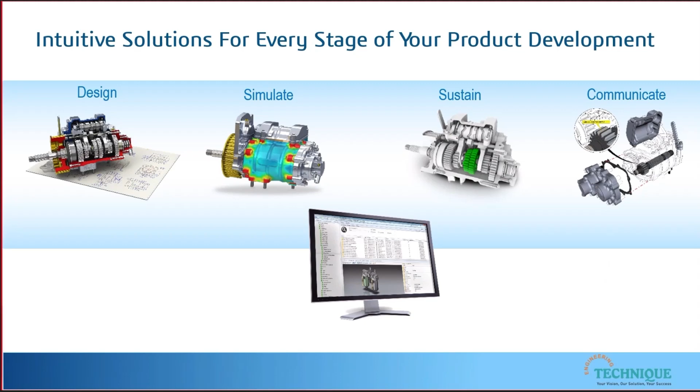Being a reseller, we are not only selling the tools, which is a common misconception people have. We provide intuitive solutions for every stage of product development, whether you want to design your product and create a CAD model, simulate your product to validate it, sustain that data, or communicate with internal and external stakeholders. We provide intuitive solutions for every department that exists in a product lifecycle.

After the pandemic, the majority of us have had to adapt to the new normal of working from home, and many businesses have adapted this into their routine. Without the right tools, this environment presents real challenges when continuing to design and develop products in SolidWorks, resulting in a loss of efficiency. If you want to share and collaborate data with your colleagues or with external stakeholders, it becomes very tough.

So we are going to present a solution for all of these issues, and we call it 3D experience SolidWorks.

As an example, to demonstrate our solution, we are going to develop a filling and labeling machine. Throughout this process, we will see what the 3D experience platform is, get an overview of it, see what a lean team meeting is and how we can arrange one through our lean tools, and then see how we can execute project planning with the help of 3D experience tools, how easily and interactively we can do it.

Then we'll witness what In-Context Modeling is in our SolidWorks CAD tool, followed by issue management—whenever you are creating a model or developing a product, there will be some issues, so we'll see how to manage them. Then we'll see what a structural system is and how we can validate our design within a few clicks, and at the end, we'll witness what SolidWorks Motion is.

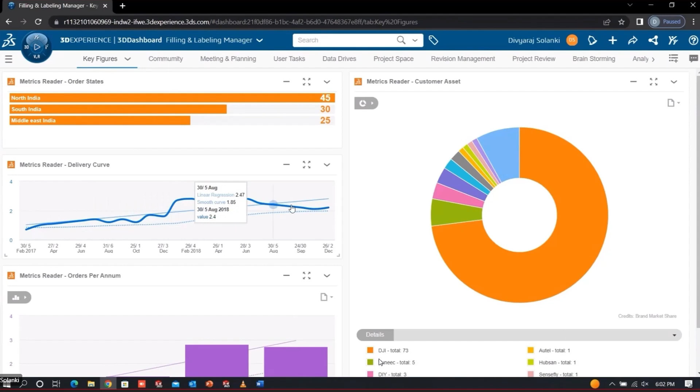Then tabs—tabs are used to manage our tools and data. We have a key figures tab where I'm attaching Excel data files like order state, delivery curves, and order per annum. I can also change the types of bars. All this boring data gets converted into infographics, and I can change the bars to vertical bar, horizontal bar, or pie chart.

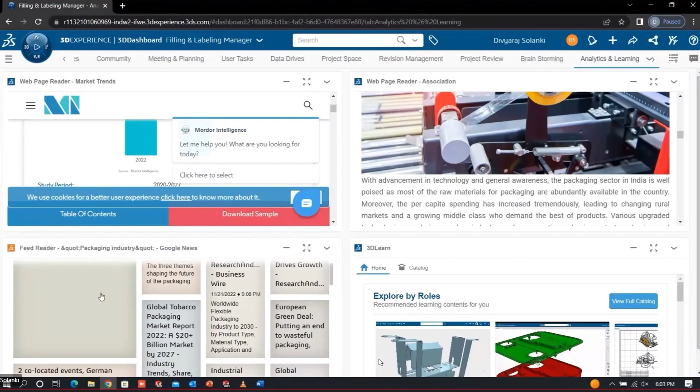In the analytics and learning tab, I have frequently visited websites loaded in a web page reader, so if I want to stay updated with market trends and associations, I can do it. I also set up a news feed to stay updated on the market in a feed reader. And lastly, I have 3D Learn, where I can learn about new tools and apps regarding the 3D experience.

Okay, so tabs contain meaningful apps and widgets. So I'll switch to the data drive, and in the data drive, they can store the data in folder structure, same as a local drive folders, but on secured cloud storage facility.

So I'm loading my 3D files to preview in 3D Play. We'll see what 3D Play is. Let me first load some of the files from my local drive to 3D drive. Just within a few drag and drops, my file has been uploaded there. I can see the preview easily.

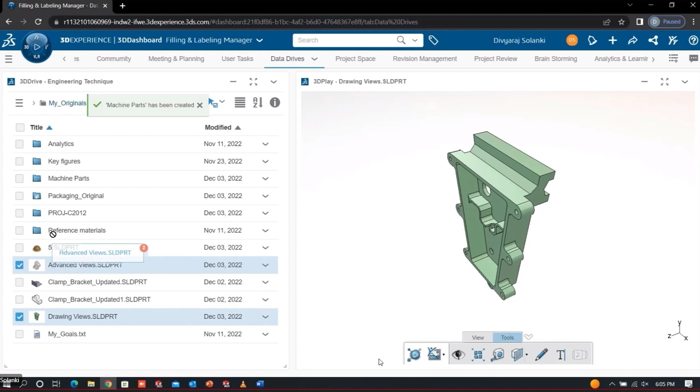We can also create folders easily. So I'm creating a new folder named machine parts. I'm creating a random folder, and I'm just dragging and dropping my old parts into that folder to manage it. You can see how easily you can do it. It is just like the file explorer we are using every day.

Okay, so let us talk more about 3D Play. So I'm loading an assembly. There is a lot more capabilities in 3D Play than just to preview the files. How? So let us see.

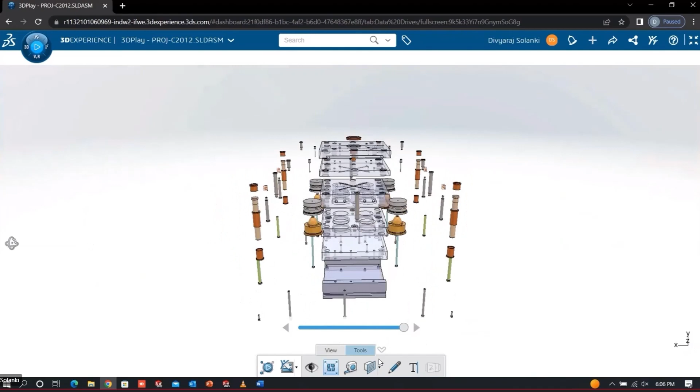In the tools tab, you can see that we have the option to change the display style of the 3D models. We have many options, like shaded, edged, wireframe - lots of options. You can also auto explode your assembly to get better details of the internal parts. It will explode each and every subcomponent of your assembly.

Then we have the option of creating a section. We also have preview - if you want to create a preview of a section model, you can easily do it. You can change the cutting plane, the position, and the angle of your cutting plane. So handling is way better.

And we also have a measure tool. If you want to measure the distance between two faces of the part, you just select the starting and ending face, or starting and ending point, and you will get the distance between them. So we can say it is similar to eDrawings, but it is a web-based app.

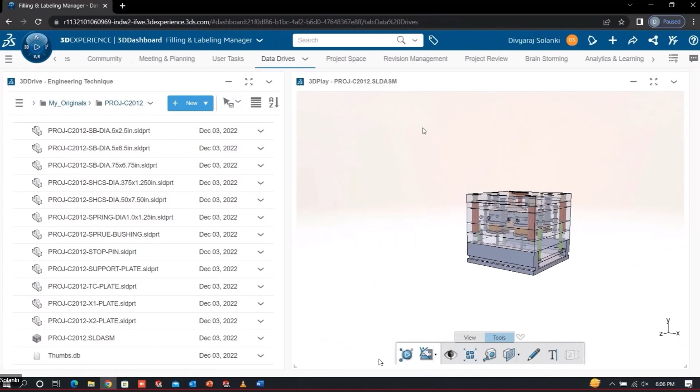Now we'll switch to the project spaces. In the collaborative space, we can create a space for our project and also configure the members involved in it. Only involved members will have different levels of access. So I have created my gearbox and machine mold.

Let me introduce you to the lifecycle tool. With the help of the lifecycle tool, we can manage the different approval processes of the product. So I have loaded a file. What I can do here is change the maturity state of the design from in work to frozen, or directly release.

So what I'll do is change that state from in work to frozen, and then release that product. So the whole lifecycle is managed throughout these tools, and we also have tools like new branch and new revisions. We can easily do it.

And let us switch to the community. So community is like a social media for the corporate world or the enterprise. It stores the history of conversations and helps you collaborate better on the project.

So we have initiated a filling and labeling machine project, and my engineer has updated me through the community. Kiran Khatri is my engineer. He updated me saying, yes, I uploaded the assembly with all the reference files on the 3D drive.

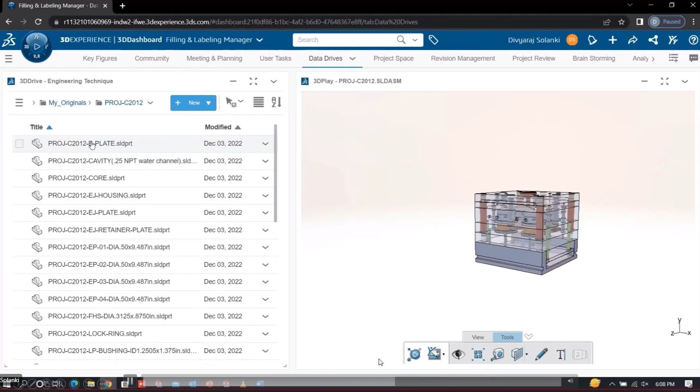Okay, so let me go to my 3D drive where my engineer has uploaded that file, and let me review that assembly using 3D Play. You can see how quickly my file has been loaded into 3D Play - it's a way bigger assembly, right? So my assembly has been loaded into 3D Play.

And I have some suggested changes that I want my team to know. So in 3D Play, with the markup tools, I can highlight the changes. I'm currently highlighting the particular areas of my assembly where I want to add notes or give annotations. I'll attach a text note to these particular arrows.

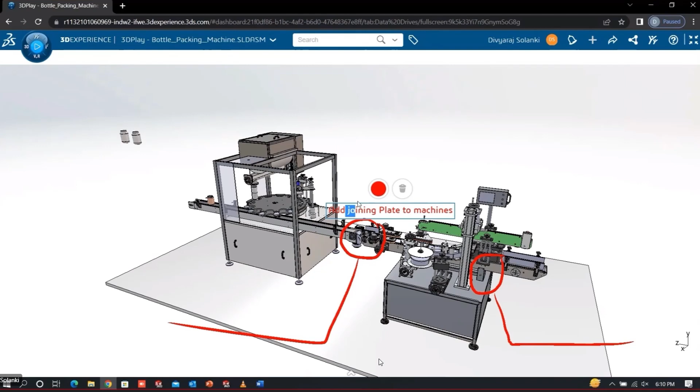So my first one is to add a joining plate to the machine, since I want to join these two machines. So I want my team to add a joining plate. The second is to add the bracket - there is no bracket into my filling machine here, so I want my guys to add the bracket here.

So I made the suggested changes, and I'll click on publish to 3DSwym so I can directly publish this screenshot to the community. First, I have to select the community, which is filling and labeling machine, my current community. I'll add the title according to my convenience.

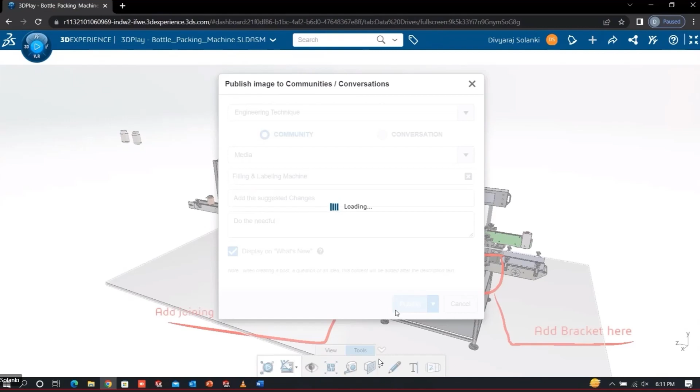I'll add the suggested changes, and I'll also add the comment, do the needful and all. And I have published it. Content has been fully published. We can check into the community that it got posted. Yes, it got posted. So post has been made into the community.

So what I'll do now is create a collaborative space regarding the project, because I want to initiate my project way further. I'll create a collaborative space to handle the whole life cycle of my project. I'll add the title filling and labeling machine and just create it.

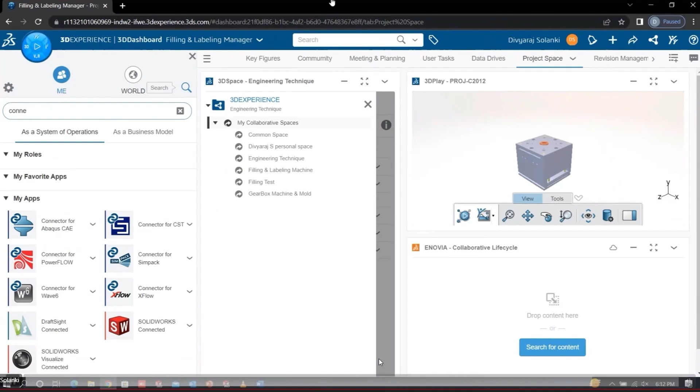So what I'll do, I'll launch my SolidWorks from the 3D Experience platform. I already opened one session of my SolidWorks, so I'll just go there and open it.

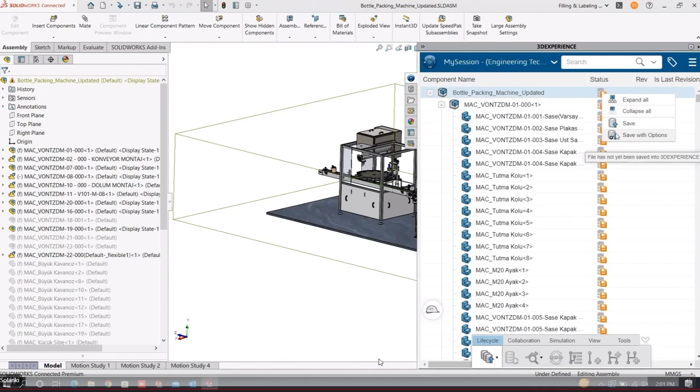So I'll load the file from the 3D drive. I loaded the file from the 3D drive. Then with the help of the 3D Experience add-in in SolidWorks, I can save the files to my preferred spaces. So in edit preferences, you can set the credential to your own collaborative spaces, and with the help of the save with options feature, we'll save this particular file into our desired space.

So I am just clicking on save to save this particular file in my space. Okay, so it got saved up. You can check the space that all the files are uploaded. So I'm going into the space and checking that my space has been filled with all my project files and the sub-assemblies of those files.

So next we'll see the bookmark editor. With the help of the bookmark editor, we can bookmark the necessary files in a structured manner. I already created a bookmark for filling and labeling machine where I uploaded my bottle packing machine only. So I'll create a new bookmark to add my filling machine also. I'll label that bookmark filling machine.

And I'll upload the assembly from here. I'll search my assembly name. Okay, so what is my assembly name? Mac-1600. So I'll search for that, and with the help of the 6W tag, I can easily search anything.

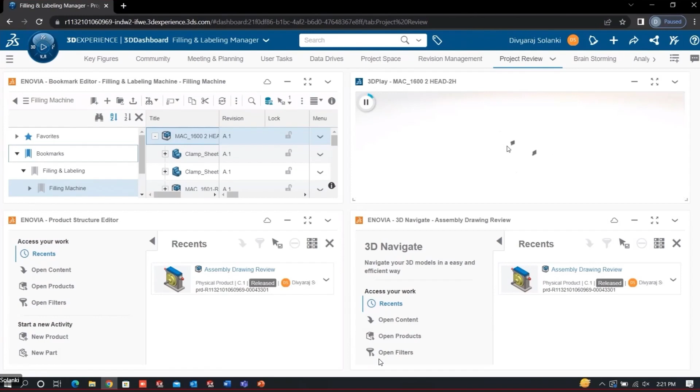So I uploaded my assembly after searching, and you can see the whole product structure has been uploaded easily, and we can also see the preview in 3D Play. 3D Play is a really great tool whenever you want to check out any kind of CAD file, any kind of file - not just CAD files, you can easily check it. So my assembly has been uploaded completely.

So now, what is our next step? Our next step is to have a meeting regarding the project. I have initiated a project called filling and labeling machine, so let us initiate the meeting regarding the project.

So let me go to the meeting and planning tab. I already created the meeting into my lean board, which is named filling and labeling machine, and I have added appropriate lean gadgets - different tool widgets that can be added to a lean board. This is my lean board, and it contains every needful tool to initiate the meeting.

We can add members to the meeting. So I'm currently clicking on the plus sign, adding Kiran, my engineer, to my meeting. Pretty simple - just search for the guy and add to the team.

So through the customize option, we can edit the team boards by adding lean gadgets as per need. So I'm searching for 3D Play to preview the assembly. I placed that 3D Play into my lean board. I also added problems and action log lean gadgets as per our need.

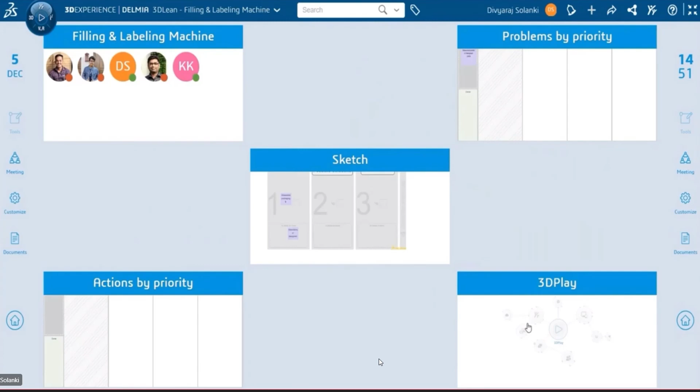So let me bring my assembly over here to preview it. And yeah, I got my assembly over here. I'll drag and drop it and it got loaded - pretty easy and fast.

All right, so let me switch into the sketch tab where the meeting is going on about what are the crises in our filling and labeling machine that we are facing currently. So we can give our thoughts and opinion through e-notes.

Okay, so let us see how we can add the e-notes. So we'll go to that edit tab. We can bifurcate our e-notes into action and problem. We have teams where we can assign, and we also have the facility of stamp stickers, whatever you say.

So what I'll do, I'll just write labeling machine vibration control. That is an issue, I labeled it as an issue. So we can bifurcate problem and solution by color.

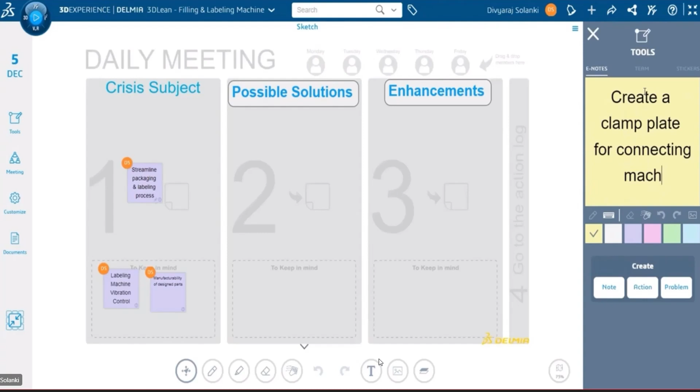I'm currently providing a solution in a different color, which is light yellow. So I've created a solution for controlling the vibration, which is to create a clamp plate for connecting the machine. First of all, I want to streamline the packaging machine.

So I'll create one note. Then the second note is we need to upgrade the clamping bracket to control the vibration. Again, I've created it as an action log.

Okay, so now what we'll do is assign members to the desired action by dragging and dropping both action and problem. So I'm just dragging and dropping members from the team and assigning them to the action and problem block, so that way they can know this will be handled by me or that guy.

Okay, so we can directly link actions to the problem. I open the problem and link the action to that particular problem. So, okay, so I'm linking the action.

We can create new actions. I'm creating some new actions, creating a new concept for the structural systems. And I'm assigning multiple actions to the problem block pretty easily. You just have to open your problem block and assign it.

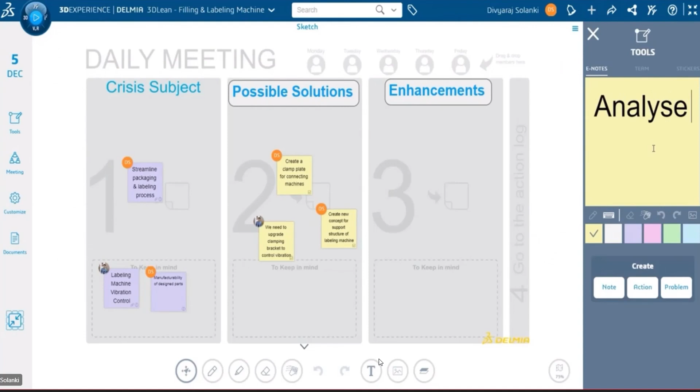And I'm also analyzing the assembly motion. I'm creating as much action as I need, and also assigning the stamps as per the urgency, whether it is high, low, or medium. So pretty easily, I'll just drag and drop my stamps to assign them to the notes.

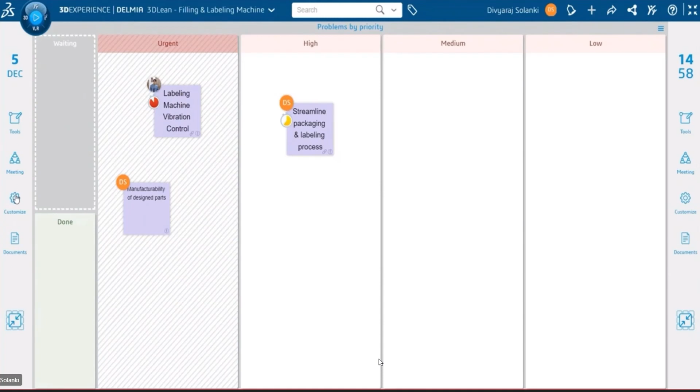So what I'll do next, I'll go to my problem link gate, where I can bifurcate problems on a priority basis, like urgent, high, medium, or low. And through customize, we can also change this interface, but I don't want to do it right now. Same in the action log.

In action, we can also prioritize this note from urgent to high to medium and low. Pretty easily we can bifurcate, so that way we can know what kind of urgency we'll be having, and we can access these tools and stickers from anywhere in every link gate pretty easily.

So let us jump back into the meeting where one of my designers has a query, like how we can create a plate for joining two machines. He's asking me a question. So it is a problem regarding design. So let me go to 3D play.

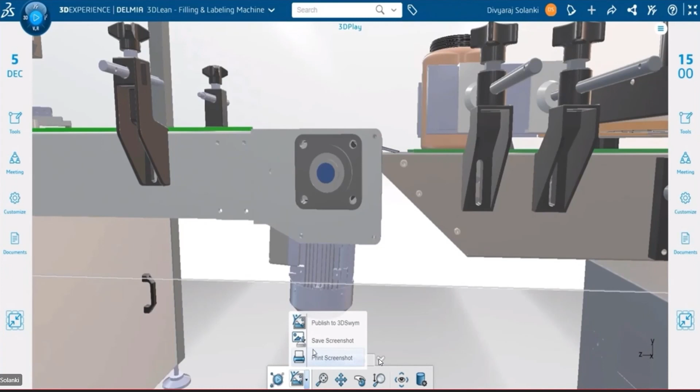3D play can help us capture a screenshot of the design portion that I want to mark up for the design explanation. So I'll just save the screenshot from 3D play, and I'll insert it into the sketch by dragging and dropping it pretty easily.

So I'll just drag and drop that screenshot from the 3D play that I have taken, and I'll adjust the size. And I'll make him understand the concept and the design intent of the plate.

So I want him to use already existing holes to create the plate. Basically, I want him to do in-context modeling for this particular plate. So I've given him a rough sketch of how he'll use the holes, what will be the shape of the plate, and all. So I've suggested changes to him.

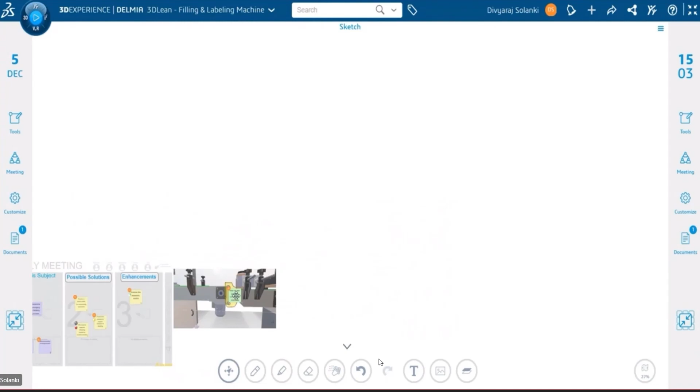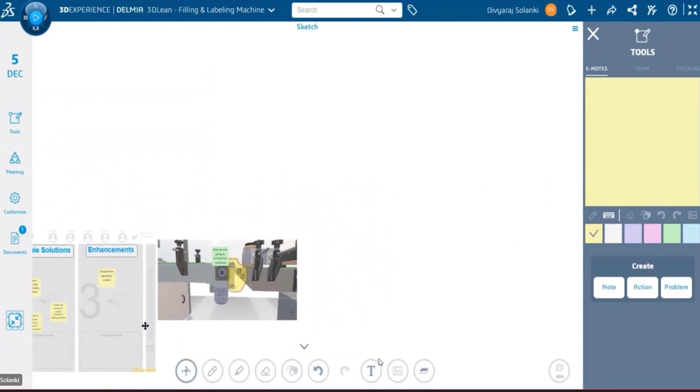Now what I'll do is go and create an action note for this problem, like create a plate through in-context modeling, and I'll just simply drag and drop that onto the problem so it gets linked automatically. So pretty easily you can handle these tools and communicate way better.

And after creating all the action logs, what we'll do is from the action log itself, we can assign the action as per task to the assignees. So we'll directly create a task according to these actions, and I can directly send it very easily. Let me assign some more members to the task and create tasks for them.

So this task will reflect into the collaborative task tab. I'll go to my user task tab, and there is a collaborative task tab where you can see all the tasks that have been reflected.

We also have options to change the properties of the task, like whether we want to attach any file regarding that task. So I'm attaching my bottle packaging machine over here.

Then we have the option to arrange the priorities according to our need, how much percentage this task has been completed, what is the plan start date, what is the end date to complete this task, what is the estimated duration, and what are the deliverables. So there are so many properties into the collaborative task.

And our task will go from to-do, to in-work, and after in-work it will go to completed. So it will complete its own three phases.

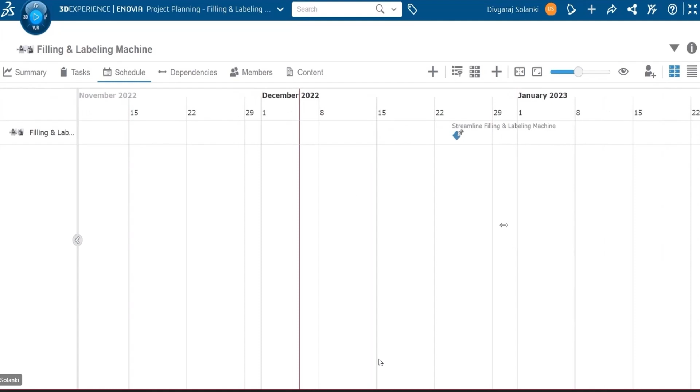And then, to achieve this milestone, I'll create a task. These tasks are the same tasks that we discussed in the team meeting. So my first task is to create a clamp plate, which I need to attach two machines.

Then I can add the assignees over here, but I haven't added any assignees to this milestone, so I'll do that later. I'll just add a plan start and end date here. You can also set the duration and tolerances if you want.

So I've created my first task. Again, with the same technique, I'll create the second task, which is clamp bracket for filling machine. I can also add some description to it.

The description will be: upgrade sheet metal to machined part, then the sheet metal to the machine part. And then I can plan my start date for this particular task and also the end date.

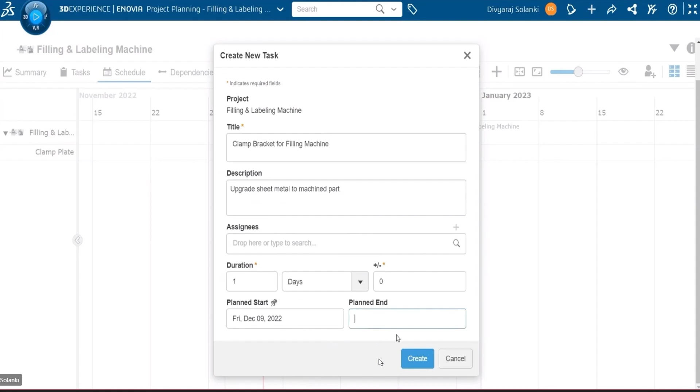So in that way, I've created my five to six tasks that we discussed in our team meeting. And now I'll add the members to our project planning.

So we have different levels of access, like leader, author, and viewer, and we can add members according to it. Then we can decide who will do what kind of task. So I've added the members.

I'll go to the schedule, I'll go to the task. We have added the members, and the pop-up has been raised. So now what I'll do is go to the task.

First of all, I'll go to the member and assign members to the task. I can just click on the assignees tab and search for the members that have been added, and assign it pretty easily. I can also assign some of the tasks to myself.

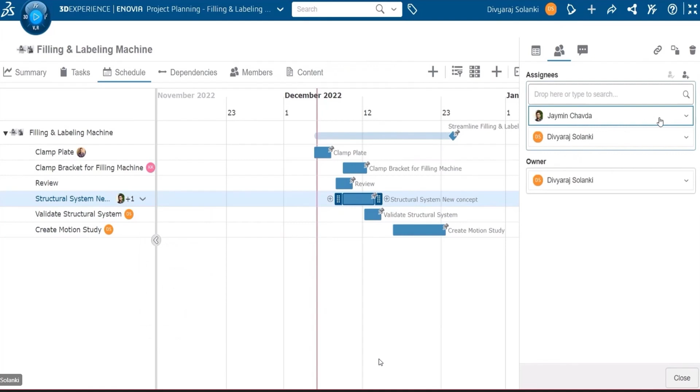We have a direct option for that, so I'll assign some of the tasks to myself also. We can also add and remove any members pretty easily.

Now my channel has been created, and the structural system concept of the new structural system also depends on the creation of the clamp plate, and the validity depends upon the structural system new concept. Then at the last, we'll create a motion study. So the interdependencies have been created throughout the whole task.

So I'll know what task we have to do first and what last. In the task tab, we can see all the tasks we have created, and in the summary we'll have infographic information about the task, the risk assessment, and all the tasks. So now I'll check all the properties of the task.

So dependencies has been created, schedule has been done. Now what I'll do is attach some deliverables. We have already seen these properties of our task. I'll attach some of the files that will be required to complete the task.

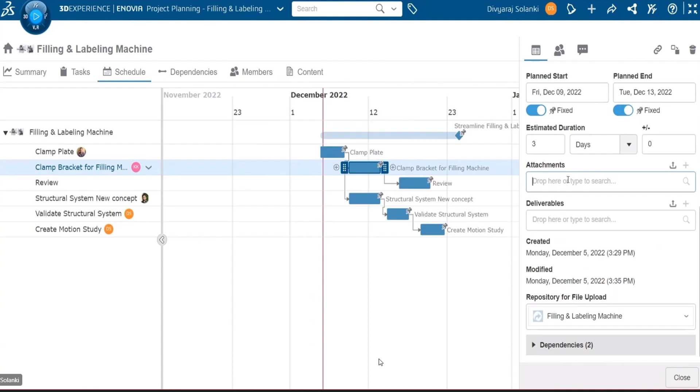Let me go one by one to the task and attach the files. We can also change the description, so I am changing the description for one task, attaching my machine or whatever assembly it is. Now all the things look great.

So my project planning is, I think, completed. I've seen all the aspects. So let us jump into the execution.

My user Anirudh will finish his task first. He's modeling into the 3DEXPERIENCE SolidWorks, and with the help of the 3DEXPERIENCE add-in, he'll go to his task, to the collaborative task, and load the assembly from there.

First let him add a collaborative task and go to his task. He'll just drag and drop the assembly from the attachment into the SolidWorks environment pretty easily.

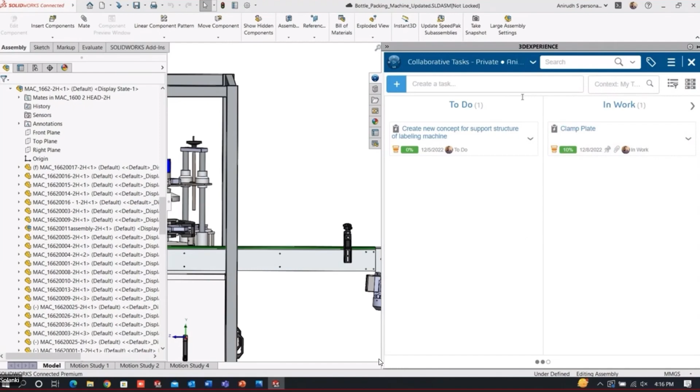Then he'll move the task from To Do to In Work, because he has started working on this particular task, so everyone will know this task is in the work stage.

So he'll add a new part to create that plate. He'll load the assembly first. He has entered into editing mode, CAD editing mode.

With the help of the sketch tool, he'll capture some of the already existing profiles. He is using the already existing geometries to capture the profile. He doesn't want to create it from scratch. This is called In-Context Modeling, where you use an already existing profile to create your own model.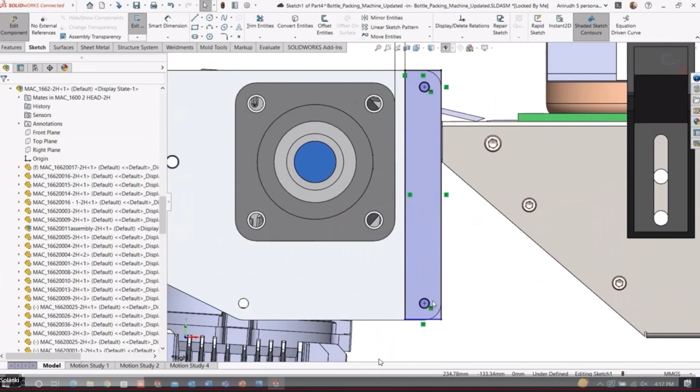That way it will be a reference to that particular geometry from which it has inherited that particular shape.

After the creation of the profile, he is using some sheet metal features to create a base flange. You can see how easily and quickly he can preview this assembly while designing it.

It becomes dynamic with reference to its adjacent geometries. So whenever the adjacent geometries change, the shape of this whole plate will change.

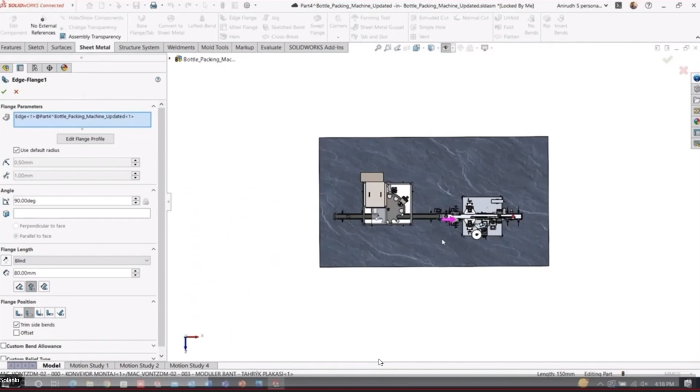He's capturing here, and you can see the preview of the real-time clearance between the plate and the filling machine rack. Now he's capturing some profile to create the holes.

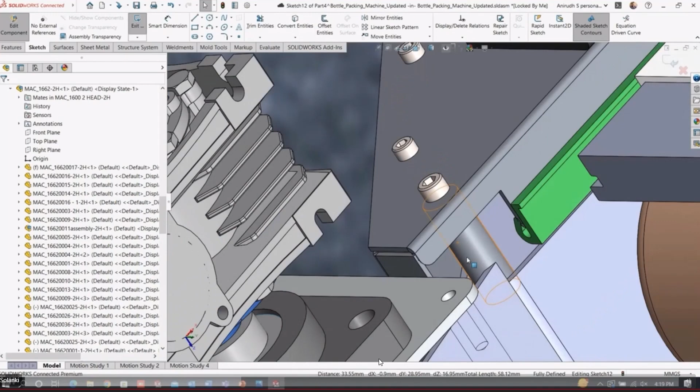He'll again take the reference from another profile that is located way behind. So he's just taking the geometrical reference and creating some profiles to make the cuts, to make the material removal from this plate.

He is constraining these sketch profiles with the help of dimensioning options. Constraining got way easier — minimum dimensions are needed since we have reference geometries. So whenever the reference geometry gets updated, your original design will update easily.

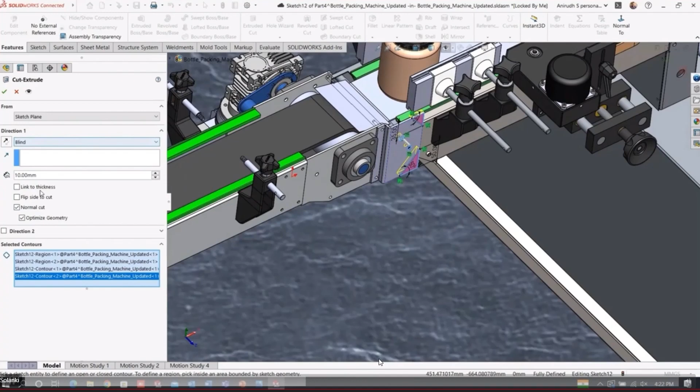So he'll initiate some extrude options, basically a material removal feature. And his plate has been created.

He'll mirror this plate exactly to the second side because it is the requirement. With the help of the mirror component option, we can easily mirror that profile to the other side.

So I'll choose the dynamic option and just click on save. The saving process of the part has automatically started. We'll cancel this.

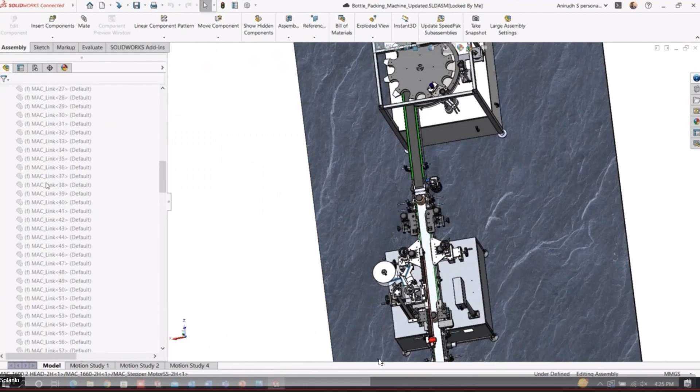So my part has been mirrored. Now what he'll do is change the name of the part, and he'll save it. It's previewing the assembly and everything looks fine.

Now what he'll do is open this particular part. He has opened the part. He'll save this part, first of all, to this PC.

Saving is taking place. And now what he'll do is create a manufacturing drawing of that particular part.

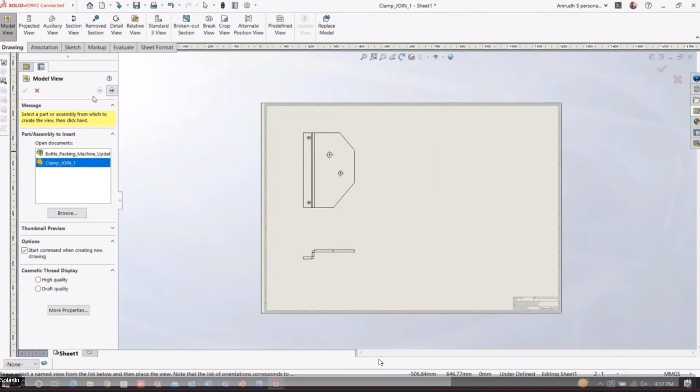First he'll select the sheet, which sheet he wants to create, and then he'll project some of the views that are required. He has also created a flat pattern development.

He added some dimensions with the help of model items, which can import the model dimensions. He'll save this drawing into the local folder.

Now what he'll do is go to his current session and save all of these parts and this manufacturing drawing to the collaborative space. He's just saving it into a collaborative space pretty easily, so the revision has been added, the file has been saved.

Let us move into our master assembly. My master assembly has been updated, so the new revision will be revision B1.

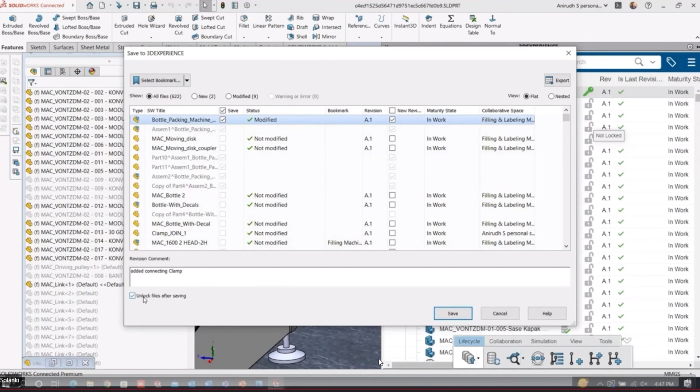So while saving the assembly, we'll add a new revision to this particular assembly. We'll go into the revision column and just click a tick mark for the new revision for the bottle packing machine. That way my bottle packing machine will get updated, and I'll also add a revision comment for history purposes. My second revision will be that I've added the connecting clamp plate. All right, and just save it.

You can see in the preview of my session that revision B1 has been updated. All right, and the user task has been completed.

So he'll go into the user task, and from in-work, he'll change the state from in-work to completed. He'll just drag and drop that task and go into the task properties, because he has created that clamp plate. What he'll do is attach that clamp plate into the deliverables, so that his manager will know what files have been changed or newly created. He'll attach that particular file into deliverables for the review purpose, and then he attaches the file and saves. Now his task has been successfully completed and he has updated his collaborative task also.

All right, so whatever changes he made, he'll also update into the community. He has loaded that revision B1 file into 3D Play, and you can see that the clamp plate has been added.

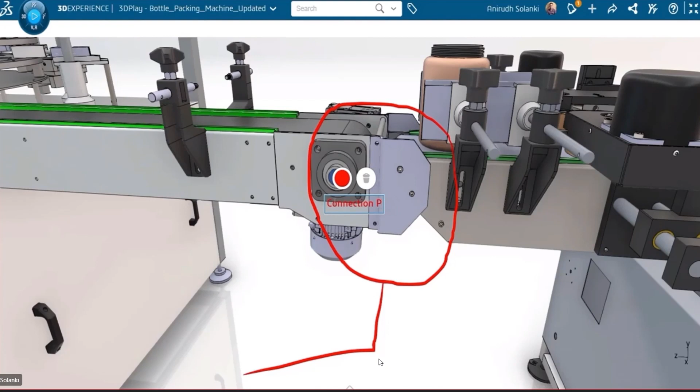Now what he'll do is use some of the capabilities of 3D Play that we witnessed earlier. He'll use some of the markup tools to highlight the changes he has made, and in the same technique, he's adding a comment to the changes. He'll upload the screenshot

from this 3D Play into our community. He'll select the community, add the title - we already witnessed this thing - and just publish it. So he has published the changes into the community.

That way, all the people involved in the project will get to know that the changes have been made or the task has been completed.

So as you have seen, the process of planning and execution of the task is very easy and very traceable. Now next, let us focus on how our team manages the issues that come up under a project development. So we'll see issue management.

My engineer has informed me through the community that we are facing some issue in the filling machine. The issues are regarding vibration. Let me go to my revision management tab - I already read the comment. I'll review this whole assembly through the issue review 3D tool.

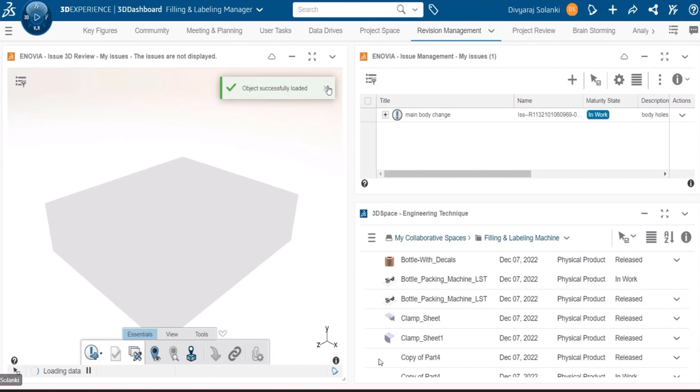My assembly is getting loaded into this issue review 3D tool. With the feedback of my production guy, I have spotted the part that was causing the vibration. So I will create an issue.

I'll click on that plus button and create an issue. I'll give it a title - change the filling plate. I already added credentials to my space. I'll set the priority and set the due dates.

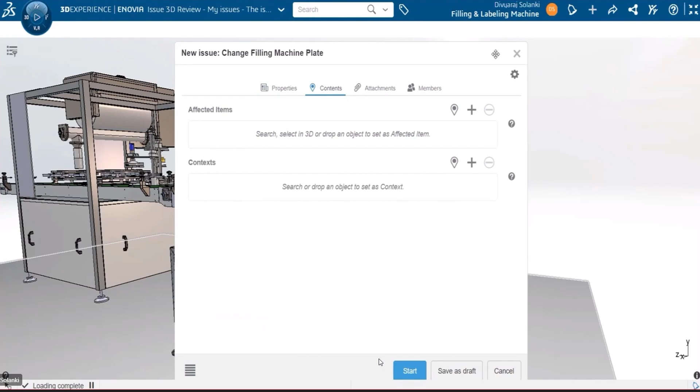I'll go to the content where I'll attach the problematic part using interactive 3D selection. So what I'll do is go into that interactive 3D selection and select the part that is causing the issue. As you can see in the pick 3D option, I've selected a part.

We also get the option to select the component according to the assembly hierarchy, so that part will affect my subassembly. I also have to choose a subassembly, and that subassembly will create an issue in my main assembly. This is the whole product hierarchy that we have to attach.

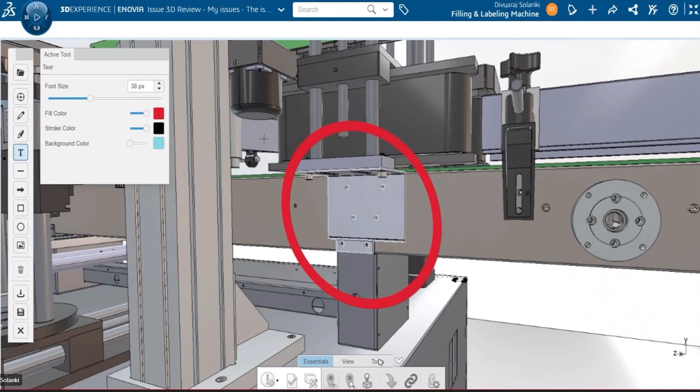After the attachment, we have options to mark up whatever changes we are suggesting - pretty easy tools to use. We have some markup geometries that we can add, and options to add notes to the markups,

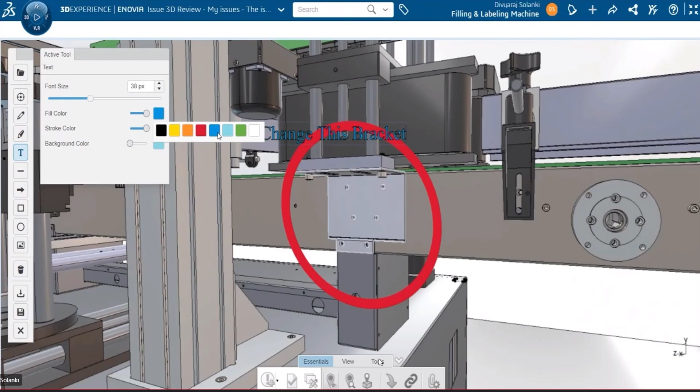and change the color of the notes. So I'm just adding a note here - change this plate, change this bracket. I can change the color, stroke, and shades - all useful handy options.

Then into the members tab, I'll add the assignees who are going to handle these issues. By myself, I am handling the issue, and I'll also be adding Anirudh, my design engineer, to look into it. And I'll just click on start.

So my issue has been created successfully. You can see the attachments and all. Okay, so what I'll do is see where my newly generated issue has been reflected.

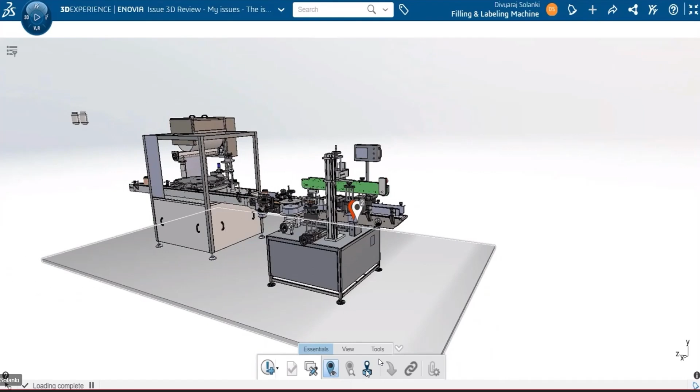So it is basically reflected into my issue management app. You can see my newly created issue of changing and filling machine plate has been reflected. By clicking on the plus button, you can see the whole hierarchy, the parts that I have attached. In the content tab, you can see what parts I have attached.

You can change the properties. In attachment, you can see any markups that I have added. We have some other options we'll explore later. In the members tab, you can see I have assigned Anirudh and others.

So I can also add a comment over here. I'll tag Anirudh. And add a comment like make suggested changes. To initiate this issue, I'll create a change action.

I want to get started working on the issue, so what I'll do from my side is create a change action. I've added the title already and I'll add the description: from sheet metal to machine part. I want this part to be changed as soon as possible. I'll add the severity and due date and save this as a draft.

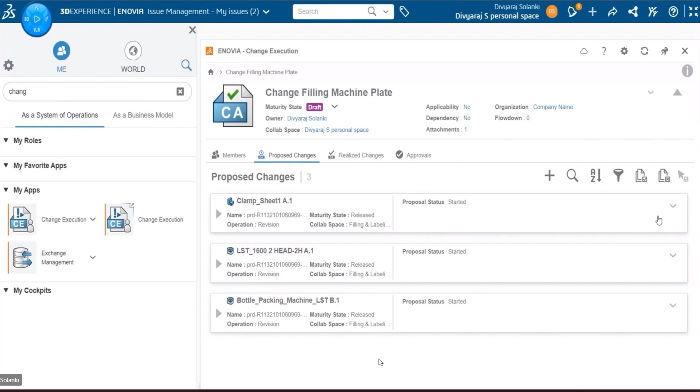So what I'll do is go into the change execution tab, add assignees, and redefine myself. Let me be the approver of this change action. I'll go into the proposed changes, and I'll do the change assessment.

In the change assessment, we have an option of the relation explorer where we can explore the part causing the issue and its relation to the files. The part has been attached to many hierarchies. Currently it's attached to my filling machine, and my filling machine connects to the labeling machine. So the whole hierarchy can be attached, and then I'll check everything.

I'll send it into work. So my change action has been sent into work. My engineer will get notified through the notification center, and now he'll do his part. So Anirudh will start working on that change action quickly.

He'll go into his 3D Experience edit tab where he'll load the change execution web app and find the change action that I have currently created - the change filling machine change action - and he'll simply drag and drop the files that are necessary. So he has dragged and dropped the B1 revision, the previous revision.

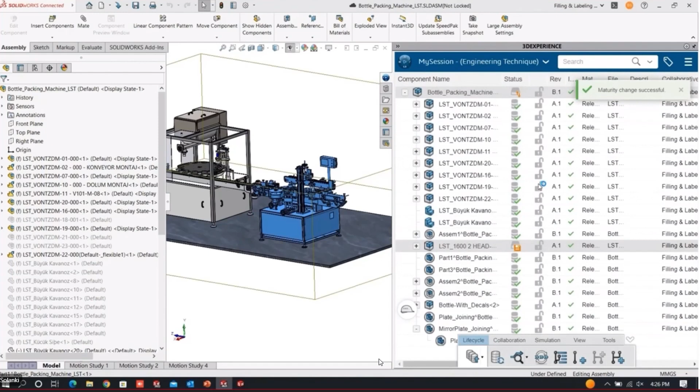First of all, he'll change the maturity state from release to in-work so he can start working on that assembly. Here also you can change the maturity state very easily into the 3D Experience editing tab. So he has changed the status from release to in-work. Now he'll open the sub-assembly.

Because the changes that we should make are in the sub-assembly. That is the plate that was causing the issue, a sheet metal plate. So what he'll do is just remove that plate. He'll delete all of this plate.

He has locked the assembly and he will insert the new part that has already been created. He just has to insert it and constrain that part. So he'll search for that part. Yeah, we got that part. He'll just open it and place it.

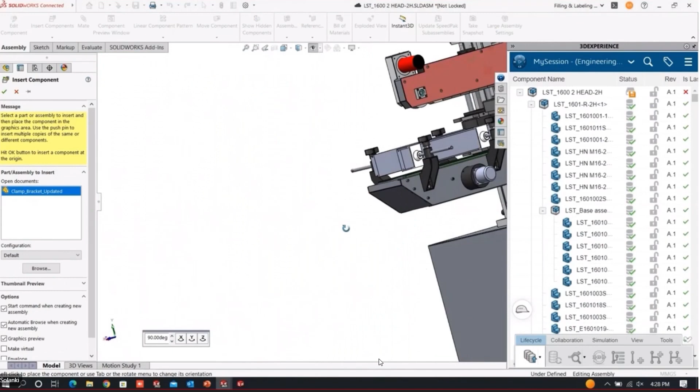It's easy to make a part with the help of assembly mates. What you'll have to do is just select the geometries, and SolidWorks will automatically suggest what kind of constraint it requires or what kind of constraints are possible. Constraints are basically in design terms; in SolidWorks language, we call them mates.

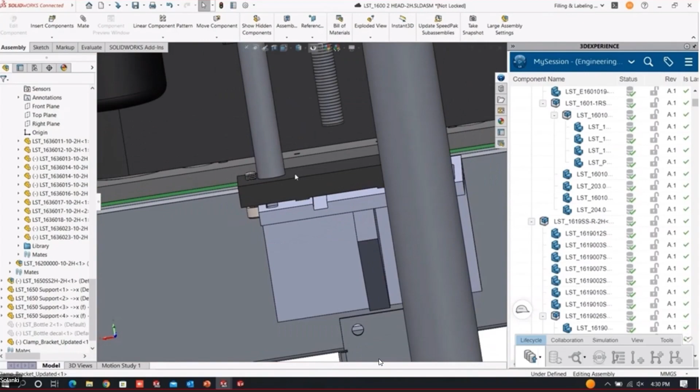Mates are used to constrain our assemblies, and in SolidWorks we can easily click to references. I'm just clicking to references and it pops up what constraints, what mates are possible between these two selections. So I'm just selecting those constraints to apply onto my assembly. It's pretty easy, you can do it interactively - just drag and drop and see what portions are not constrained, select them, and constrain it pretty easily.

Then I'll mirror this part to the other side also. I already selected the plane, now let me select the part. I'll go to my dynamic mirror option, and then I'll mirror it. Also, I'll constrain this part so some of the area gets constrained.

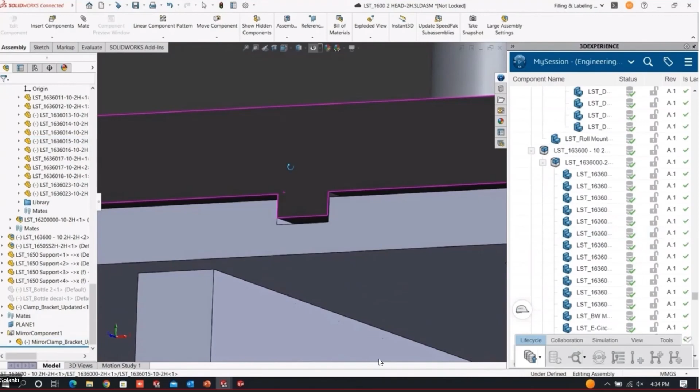So I'll constrain my whole part. Then before saving the changes, he'll choose the change action under which the issue has been raised. He'll select the first change action, which is under construct, and save these particular changes into that change action.

You can easily see that the C1 revision has been created. Now he'll disable that change action. So he's disabling this change action. Yeah, he has disabled it.

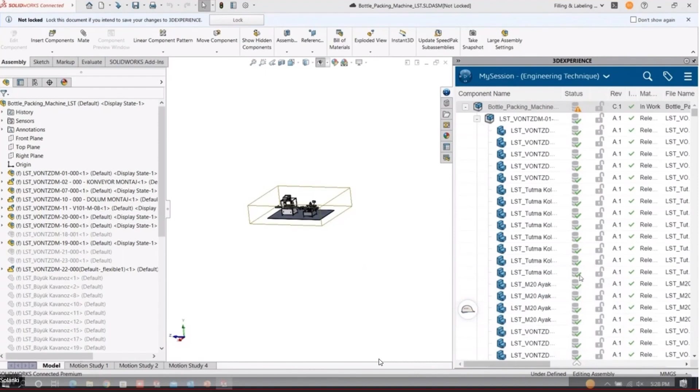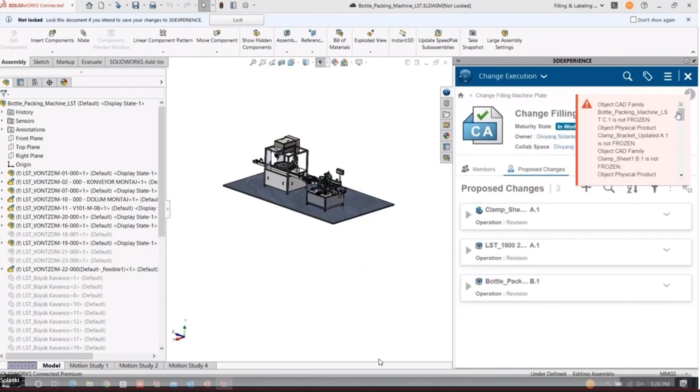Now he'll go to the change execution. He's previewing the assembly, then goes to his change execution and sends it for approval. He's changing the maturity state of his change action to approval, but it shows an error. The error indicates that some of the parts are not in the frozen state, so he has to freeze them first. He has frozen them all, and now he'll change the state to approval. Now you can see it got approval.

So it is an error proof process. It will not let you move ahead unless you follow its predefined workflow. He was forced to freeze all the files, save it, and then ask for approval. This is a full predefined workflow. If someone tries to breach it or forgets to do the necessary steps, the software will remind him to do that first.

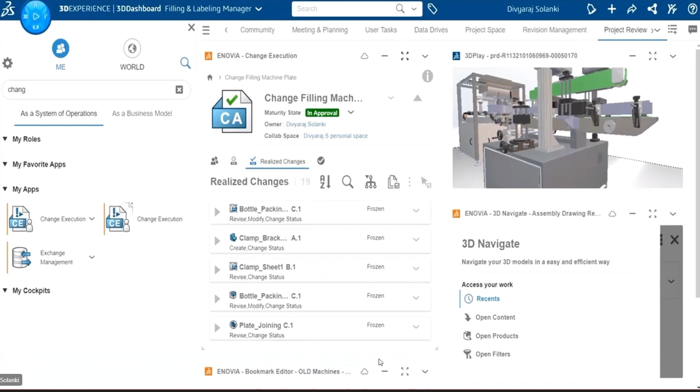My change action has been created and now I got notified that my change action is in approval state, so I will review it. I'll go to change action, realize changes, and I can see the newly created revision of my bottle packaging machine.

So what I'll do now is compare my newly created revision to that old B1 revision. I'll go to ENOVIA compare and compare my C1 and B1 revisions to see what changes have been made. I can see the bifurcation from the structural manner, and I can also see what changes have been made into the properties. We also have an option of 3D view where we can spot the 3D visible difference between the two revisions.

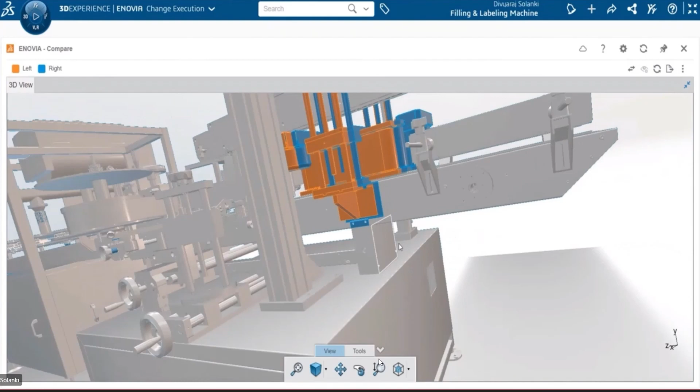Here you can correctly see that two color combinations are given. The orange color states the new changed part in the new revision, and the blue states the old revision parts that were in revision B1. So we can spot the difference pretty easily with the help of the 3D view option. Even a layman can see what changes have been made. Same with the Product Structure Explorer, you can just scroll through it and see what changes were made there.

So I think I'm satisfied with whatever I am seeing here. I'll go to the approval tab, add a comment, and approve this whole change action. Let me add the comment, like 'great work, good work', whatever you want to add, and I'll just approve this change action.

So I have clicked on approve. Now my change action has been approved. I'll click on that notification to execute the changes. My change action has been completed. I also change the state of my issue to completed, because my change action is completed, so my issue is also completed. All right, so it has also been completed.

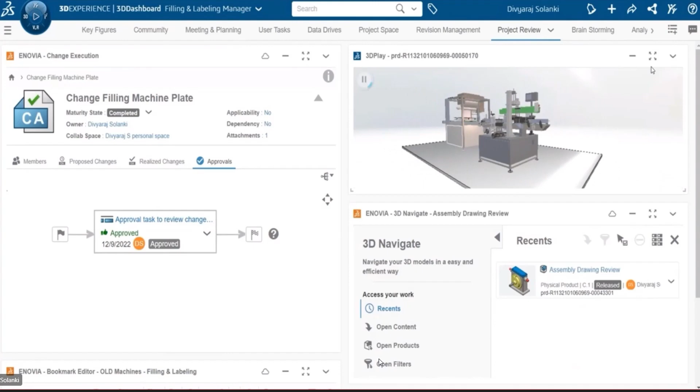Now what I'll do, following the practice I've shown throughout the video, is update my community with whatever changes I am having. So I'll go into my 3D play, load my new revision, add the markup tools for whatever changes we have made, and add text to it. What I'm currently doing here is adding a history, since my product lifecycle is currently following a history into my community, updating whatever changes I've made.

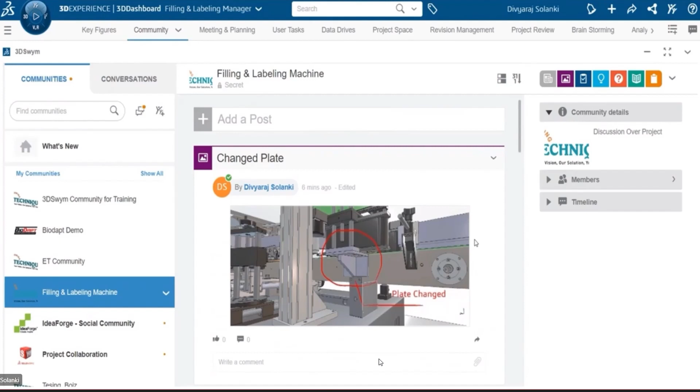So whenever a new guy comes in, he can just scroll through that community and see the whole history of this product development: what are the stages, at what time changes were made, and what is the gap between initiating a previous issue and a current issue. He can track all of this with the help of the community. That's why I keep it as a practice that whatever changes I make into my assembly, I make sure to upload it into the community.

Okay, so we have seen the issue management. We have already done the project planning. So next, let us focus on how easily you can create a concept using a tool like 3D Sketch.

This is my production guy, Jamie. He has excellent field knowledge, but he isn't that proficient with tools like CAD tools and all. But if you want to express his concept, let's see how we can do it.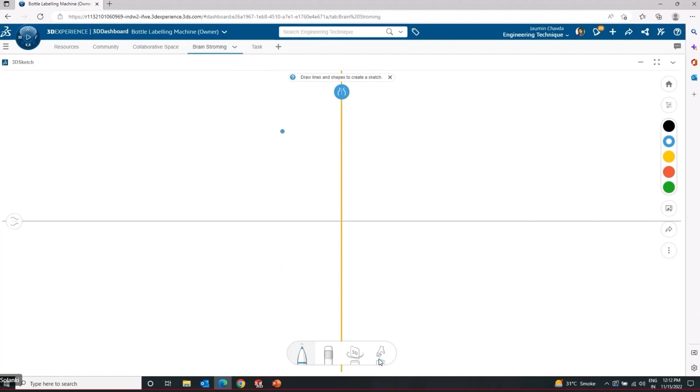So he is going into the 3D sketch. First he will select the community in which he wants to publish this concept. He's searching for the community, and he's got that labeling machine community that we have created. With the help of symmetricity and these tools, he's creating a concept. This concept is basically the frame structure for our labeling machine.

He wants to express his way of how we can control the vibration of this machine by just upgrading the frame. So he's giving us a little bit of thoughts.

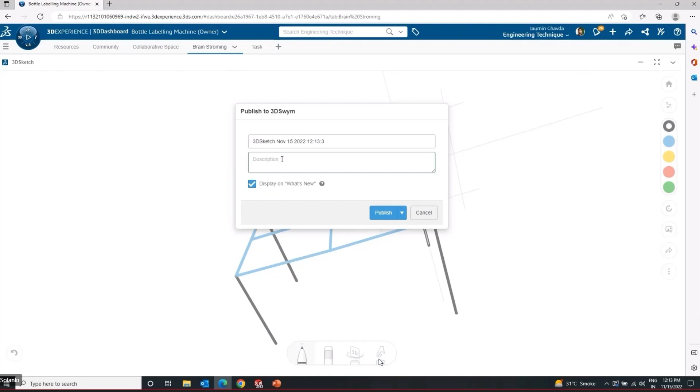You can see how easily he's just switching between the tools. We don't have many tools, just 3 or 4 tools, and with the help of these, you can easily create a concept of the structural system. Now he is publishing into 3DSwym.

He has commented it, frame changes. So what he'll do now, he'll go to his community tab, and you can see his concept has been updated into the community. So he has given his input, and without being proficient in the CAD tool, he did it pretty easily, right?

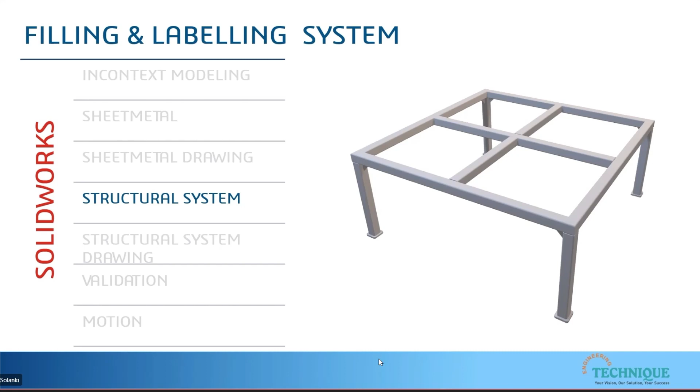So now my engineer, Jaumin, has suggested some changes into the frame. So let my CAD designer handle that concept, and their task is to bring that concept into reality. So we are going to use a structural system option to do that.

So what are some of the benefits of the structural systems? There are many benefits, such as saving time and development cost will also be saved, and it will increase your productivity. So let us see how it can increase your productivity.

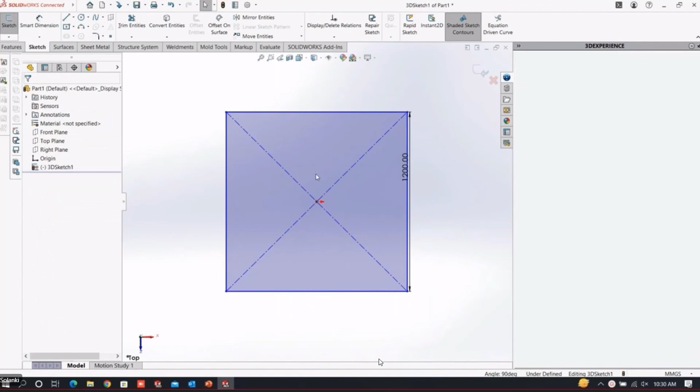So what I'll do, I'll go to the SOLIDWORKS environment to create the support structure for the labeling machine. I'll go to the 3D sketch to create the skeleton of the structural concept. I'll constrain my sketch, trying to reflect the exact same skeleton that has been suggested by my engineer. I'm constraining legs for my structural system, and boom, within a few seconds, my skeleton has been created.

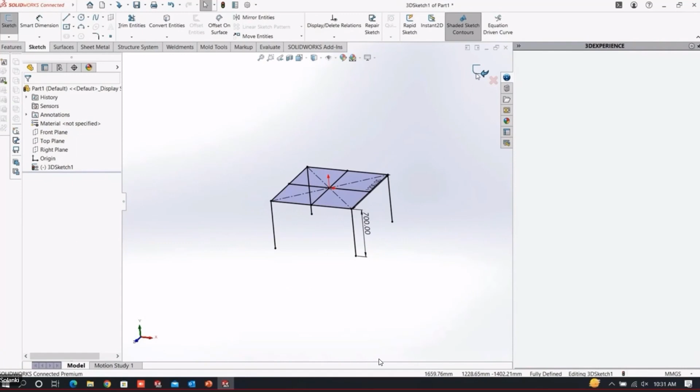Then what I'll do, I'll assign square members with the help of the structural system. I'll choose the standard accordingly, and I'll also add some corner management, and my structure is ready within a few seconds.

Then what I'll do, I'll go to the static simulation tools to validate my design. First I'll create a new study, then I'll go to fixtures to apply fixtures to its base.

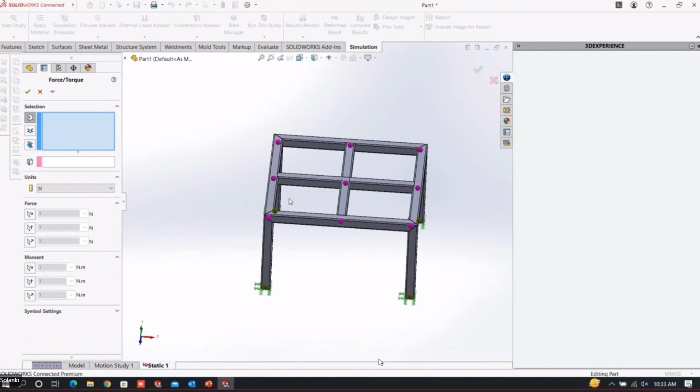So I have applied a fixture to 4 bases, and then I'll treat all members as beam elements to get a more fast and accurate result. Then I'll go to the respective load to apply it, select the direction of the load, select the intensity of the load, and then okay.

I'll just create a mesh, so my 1D mesh element has been created. Then I'll assign appropriate material to my whole frame structure. I want to assign a stainless steel material, and I'll apply it.

Now what I'll do, I'll just run the study. So my study has been completed within a few seconds. After study completion, we can check the maximum stress and displacement plot in the result tab. We can also animate the displacement that has taken place — it's a virtual representation.

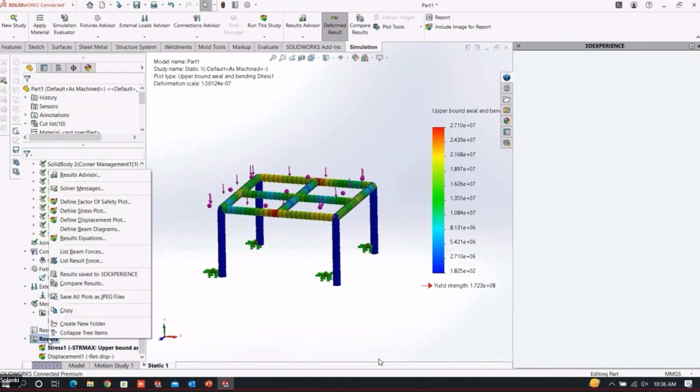And we can also create a plot for factor of safety for our model, so that way we'll know if our model is safe or not. So I'm just generating the factor of safety, and I think my model is way ahead of whatever I need, so it is safe. Now what I'll do, I'll first of all save this into my space.

Then I'll create a manufacturing drawing of this frame. I'll choose the sheet that I want to use, then project the views that are required. I'll also generate a bill of material and project each and every member. With the help of automatic dimension, I'll also drag our required dimension into it automatically.

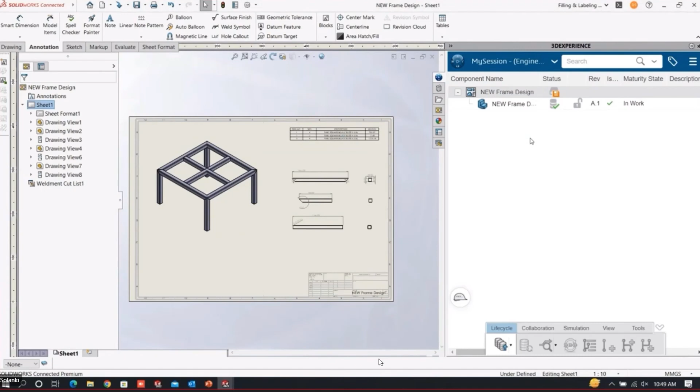Then I'll save this whole manufacturing drawing into my space. So the revision has been added. Let me grab all those files from the cloud, and in the cloud I'll change the maturity state of this file. There are many options given from the 3D Experience add-in, you can do it from the collaborative lifecycle app, so there are many options to do these things.

So we have created the structural system drawing pretty easily. What are the benefits of it? You can automatically create a view, place the dimension, automatic production quality details are given there. Drawing errors will be avoided, and the cut list table, which is basically the bill of material for all kinds of members used in it, contains details like the member channel name, the length, and the weight. It automatically generates that bill of material for you.

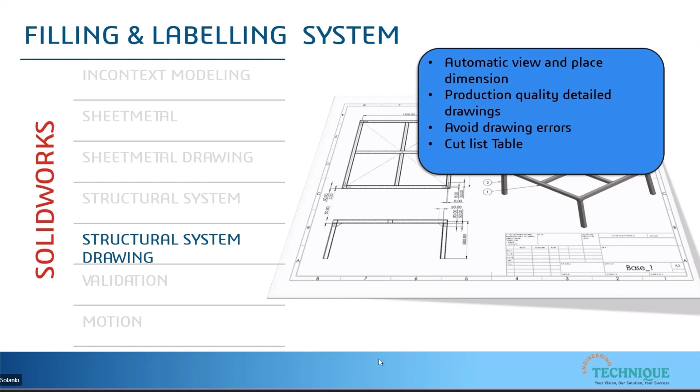Then we also witnessed the validation, how we can easily validate, quickly apply fixtures and all, reduce the need for costly prototypes, eliminate the rework, and save time and development cost.

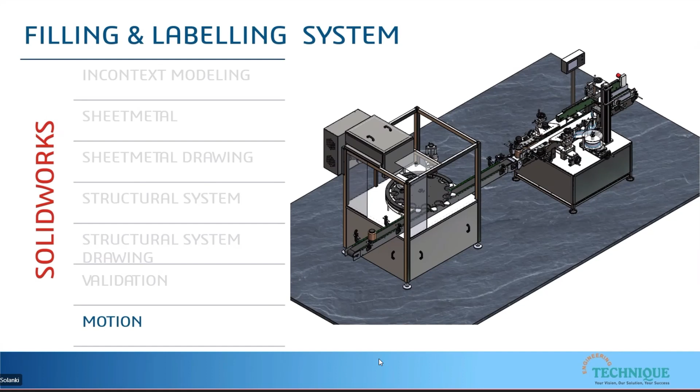Now let us move to the assembly motion. I'm not going to show you all the settings regarding the motion, but let us preview the capability of our SolidWorks Motion. We have initiated our project and created the whole project. Let us see how this whole streamlined process will work with the help of SolidWorks Motion, where we can easily replicate the real life motions of our assemblies and also calculate the force acting on every object.

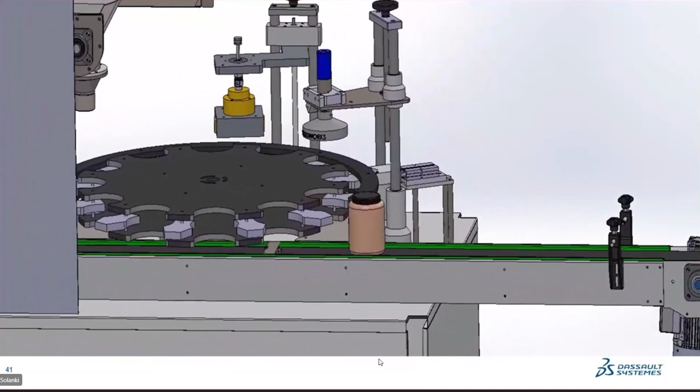So my bottle, currently I'm demonstrating a process flow of how a pharmaceutical bottle is filled, capped, and labeled with the help of SolidWorks Motion. My bottle is then capped, and this cap gets fit with the help of tools. Then it will go into the next process, which is the labeling machine. Precise contact options and material specifications let you model accurate and close to actual scenarios of how that object is going to behave in a real life situation.

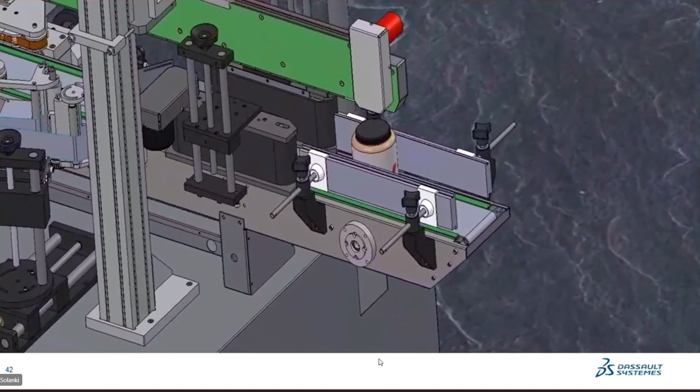So my next thing is to get my bottle labeled. This is a pretty easy process, not as many stations as in the filling and capping process, but still. It is going into the labeling process, and in between it got labeled. So with SolidWorks Motion, you can replicate this whole process, present it to your vendors for demonstration purposes, and also use that data to validate your whole assembly. I think that was our last topic.

Let us move to the summary. We have already witnessed what a platform is. The 3D Experience platform is an ecosystem to connect people, process, data, and apps to ensure that your work is not affected at any point of time. It will ensure you can do your work from anywhere, any place, on any device.

Most of the data management tools we've witnessed are web-based, whether it's project planning, meetings, or issue management tools, they are all web-based, and you can access them from any device. It's a login-based license, so it's a very useful tool. We've seen meeting and planning tools, project planning tools, product revision tools. Ultimately, its purpose is to help guide you through your whole product life cycle, and never let you feel any kind of disturbance throughout it.

Then we've seen issue management, change action, how we can do it. Then we've seen concept creation with the help of tools, how we can execute and validate those assemblies. And lastly, we've witnessed the assembly motion.